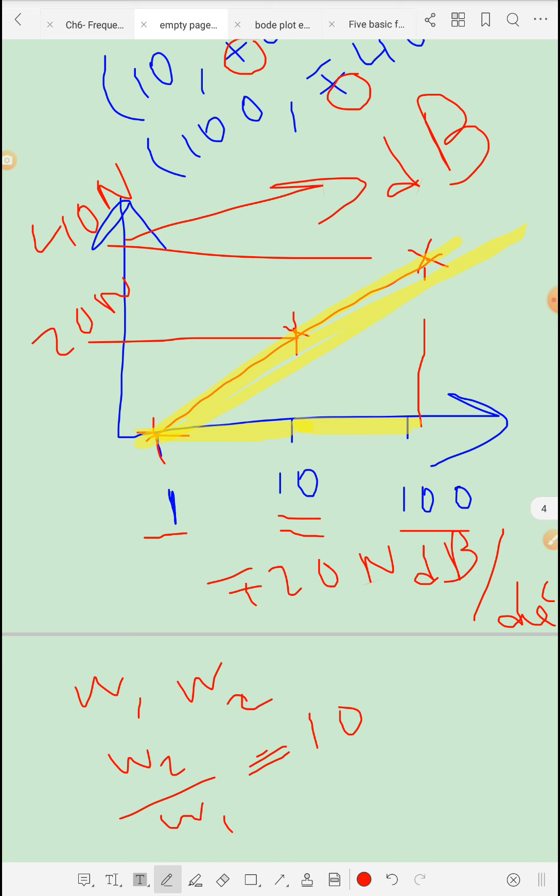If it was negative, it will be minus. So the final result is that this line will be a line of slope plus or minus 20 n dB per decade. Per decade means the ratio is 10 between two frequencies, so between them it will have this plus or minus 20 dB. Plus will be for zeros, and minus will be if we have poles at origin.

And if you remember, the poles at origin, we call it system type, and we give it the symbol n. This is why we are using n, because zeros at origin are rarely encountered, but poles at origin, the system type, frequently appear in transfer functions. So I will go back to our location.

Okay, so we have proved that this will be a straight line, and its slope will be plus or minus 20 n dB per decade, and when the frequency is 1, it has a value of 0 dB. So it should pass through the 0 dB line at omega is equal to 1.

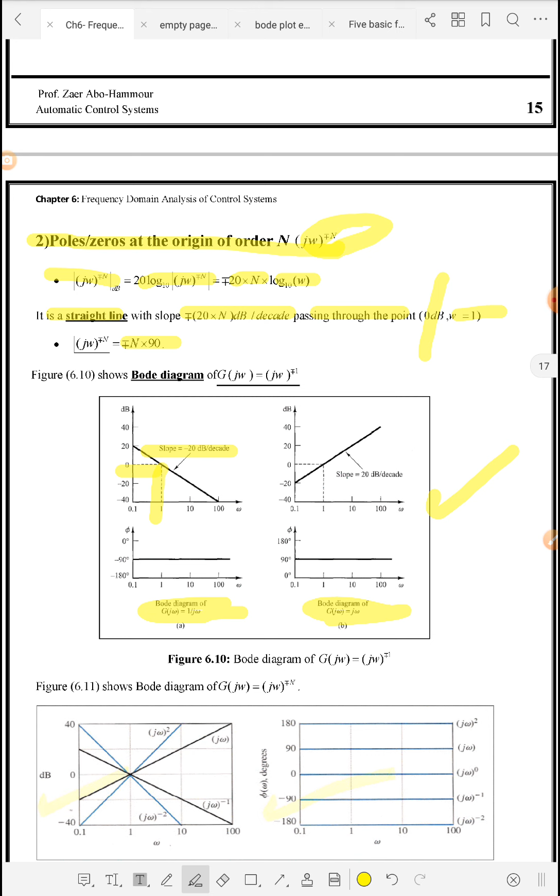And the phase for any pole or zero at origin will be plus or minus 90 n. Plus or minus 90 n. Why plus or minus 90 n?

Okay. If we consider that we have a zero at origin, which is j omega, so if we plot this zero in the real and imaginary axis, it will be located here. Okay, so regardless of the frequency, it will be always on the imaginary axis. Whether the frequency omega is 1 or 10 or 100, it will be always on the imaginary axis.

And as we studied in root locus, the angle will be from the positive real axis in the counterclockwise direction. So what's this angle? It's always 90 degrees. So if we have a single zero, the angle will be 90. Okay, if we have a zero at origin repeated of power 2, like s squared, what will be the case? It will be j omega to the power 2, which is equal to minus omega squared. Where's minus omega squared? It will be on the negative real axis. Regardless of omega, it will be here or here or here. So it will be always on the negative real axis. So what's its angle? It will be minus 180 degrees or plus 180 degrees.

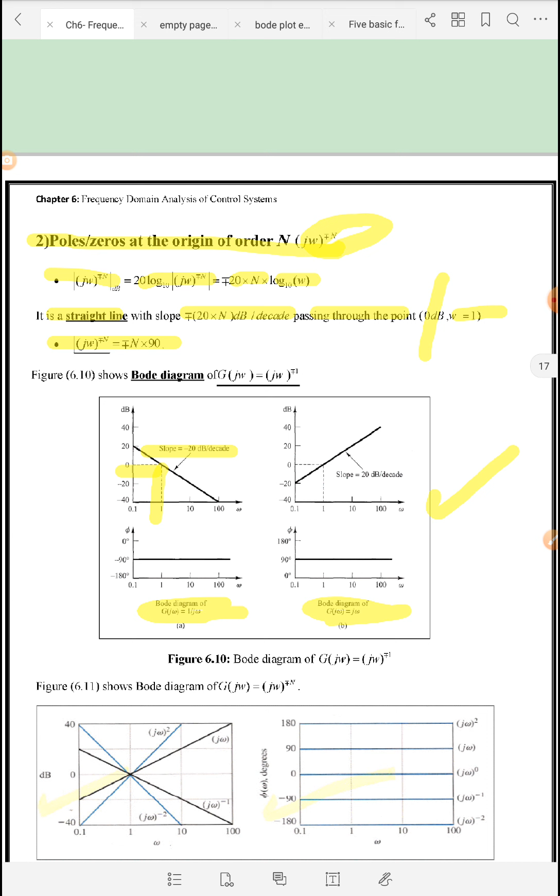So we understood that for a single zero, s, it's 90. S to the power 2, it's 180. 1 over s, it's minus 90. 1 over s squared, it will be minus 180 degrees, regardless of the frequency. It's constant for all frequencies. So what's the general rule? The general rule is that it will be plus or minus 90 times n degrees. So if n is 1, it will be plus or minus 90. If n is 2, repeated, it will be minus 180 or plus 180. This rule is clearly written in the handouts. It's here. The angle or the phase is plus or minus 90n.

Okay, so again, if we return to this figure, regarding the phase plots, this one and this one, for the pole it will be minus 90. As you see here, it's minus 90, and it's fixed for all frequencies. And if it is a zero, it will be plus 90, and it's fixed for all frequencies. So this is the case of a single pole or single zero, as obvious here.

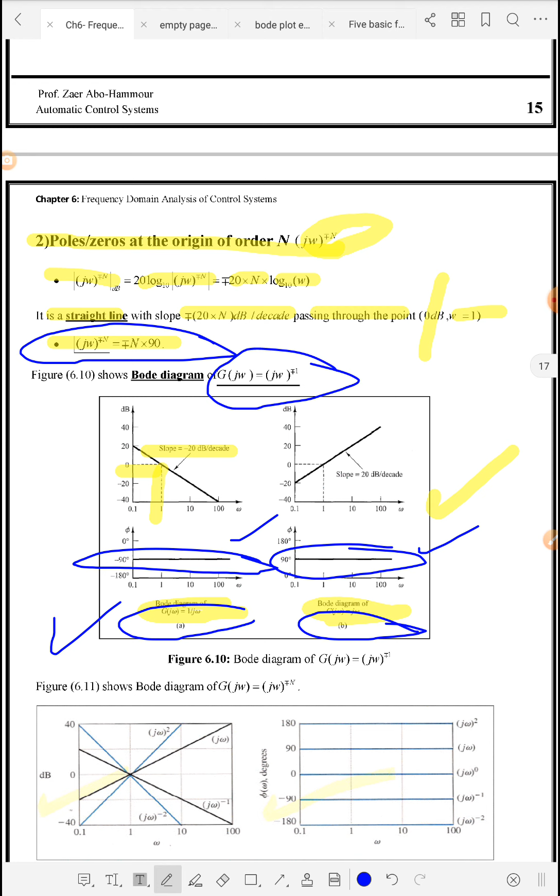So in the general case, as I discussed on the empty page a minute ago, if we want to have more cases and discuss the angle, here, if no poles or zeros, it's 0. If we have one zero, 90; two zeros, 180. One pole, minus 90. Two poles, minus 180.

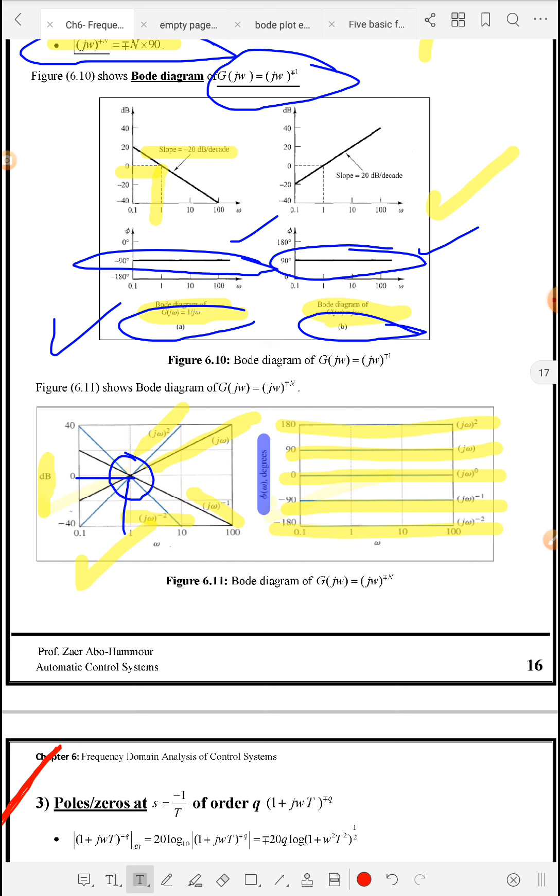And regarding the magnitude plot in dB, if you have one zero and check the slope, as I mentioned, it will be plus 20 dB per decade. If we have two zeros, it will be plus 40. If you have one pole, minus 20. If we have two poles, it will be minus 40. And if you pay attention, all of them pass through this point. What is this point? It's at a frequency of unity, the value is 0 dB, as I mentioned before. So I hope everything is clear regarding the second term, which is poles or zeros at origin.

Let us switch to the third factor, which is real roots. Real roots at s equal to minus 1 over T with multiplicity q. With multiplicity, they might be simple real roots or repeated roots. And the root location is at s equal to minus 1 over T. So if we calculate the gain in dB, it will be 20 log the absolute value of this term. We take this q outside the log, and we calculate this, which is the square root of the real part squared plus the imaginary part squared. It's the argument of the log.

Okay, so if we pay attention to our root, there is 1 and there is j omega T. There is 1 and there is j omega T.

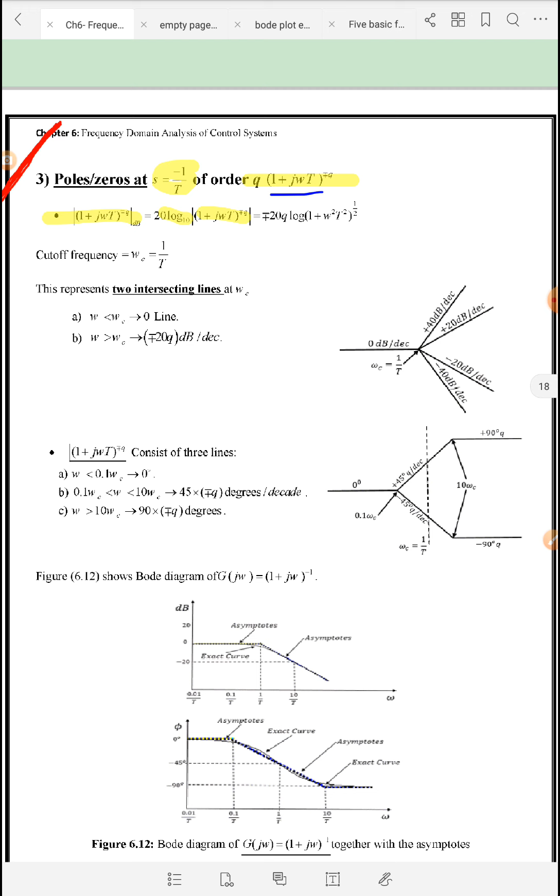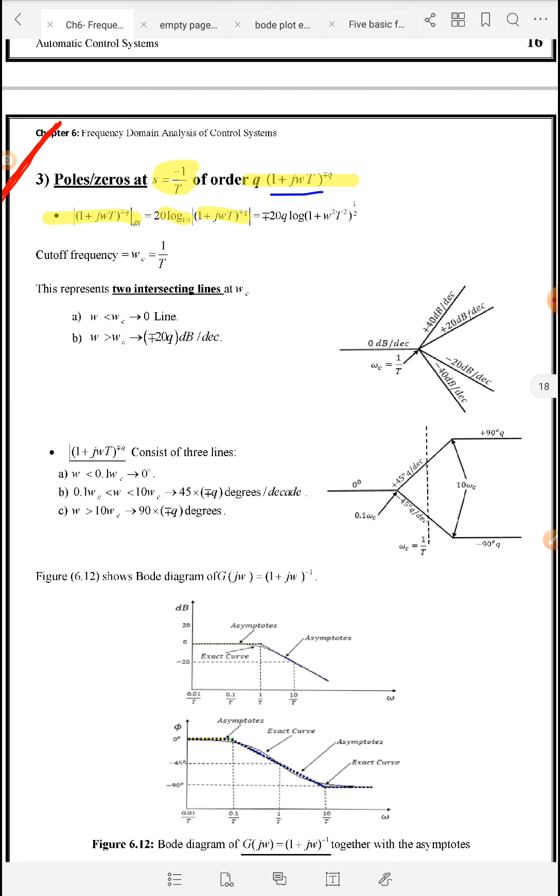Okay, here, as I mentioned, we were comparing the frequency with 1 over T, which is less or more. So we call the cutoff frequency, or the corner frequency, 1 over T. And as I mentioned, if omega is much smaller than omega c, it will be the 0 dB line, this one. And if omega is larger, then it will be same as pole or zero at origin. It will be plus or minus 20, but there it was n, and here it's q dB per decade. So it will be here for 2 zeros, or a repeated zero, here single zero, here single pole, here 2 real poles.

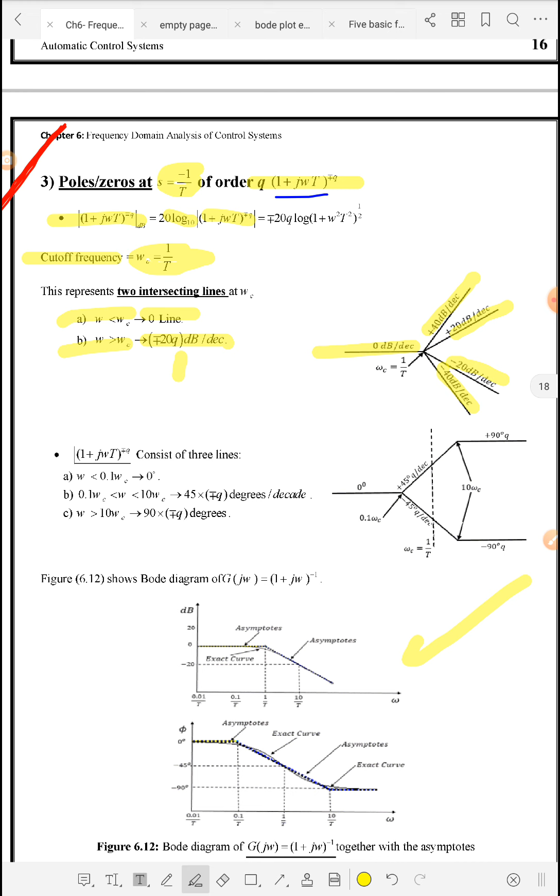So in order to validate that we are working in the correct direction, we will draw the magnitude and we will observe this figure. Okay, pay attention to this figure. In this figure, we have drawn the exact curve and the asymptotic curve. Here is the corner frequency I mentioned, it's 1 over t. And we are dealing with decades, 10 over t, 0.1 over t, 0.01 over t. The ratio between each frequency and its next right or next left is 1 decade.

So if we focus on this graph, we see that the asymptotic graph of two asymptotes is very close to the exact. Where is the exact? This is the exact one, the solid line. So both of them in this area and in this area are coincident, while here there is a very minor difference between the asymptotic and the exact. So our graph based on two asymptotes, this asymptote and this asymptote, is very close to the true case. So based on that, our approximation is very nice. Okay, so this is regarding the magnitude.

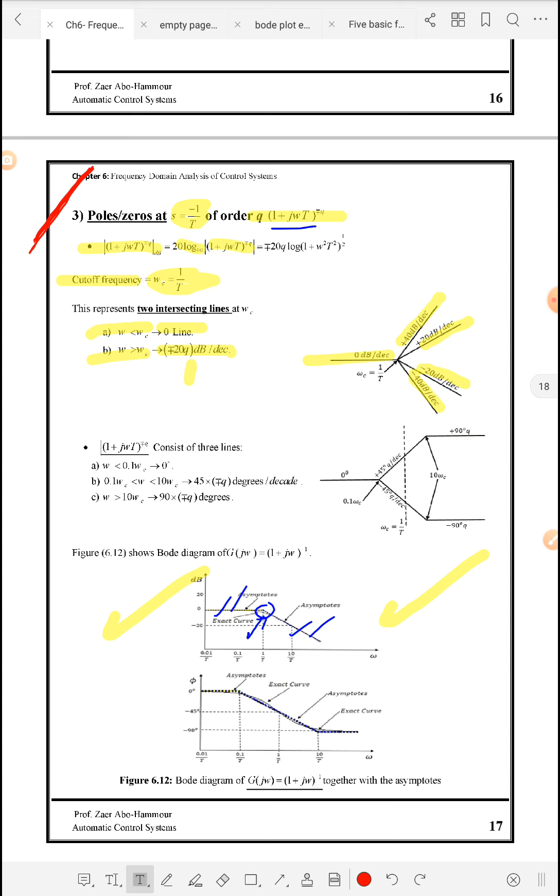Okay, if we draw the phase part, here the phase part is drawn. And as we see, this phase part consists of three asymptotes or three straight line segments. This is the first one. This is the second one. And there is one that is connecting them. So there are three asymptotes for the angle or the phase of this, not origin, sorry, real pole. Here, if you see, it's a real root, a real pole.

Okay, so the phase graph consists of three asymptotes: this one, and this one. And each is valid within a certain range. The first asymptote is valid for all frequencies less than 0.1, or 1 decade below the corner frequency. Here is the corner frequency, 1 over t. So 1 decade below the corner frequency is this one. And for all frequencies less than 0.1 omega c or 0.1 over t, we have this approximation, which is 0 degrees.

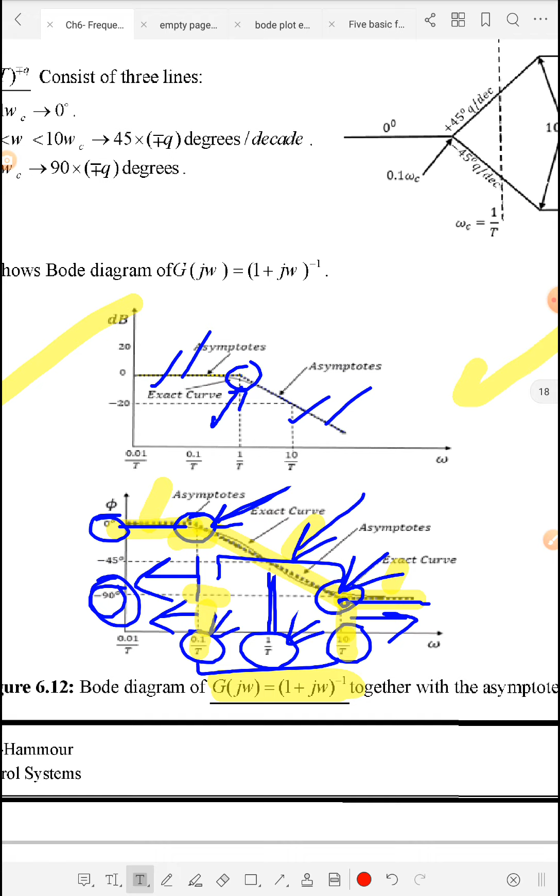So if we pay attention to the handouts, the phase of this one consists of 3 asymptotes, not 2 asymptotes. For frequencies less than 0.1 omega c, 1 decade below the corner frequency, they are 0. For frequencies larger than 10 omega c, they are plus or minus 90 q. In our case, minus 90 in this example. If we have a zero, it will be plus 90. If we have 2 zeros, it will be plus 180. If we have 2 poles, it will be minus 180 degrees.

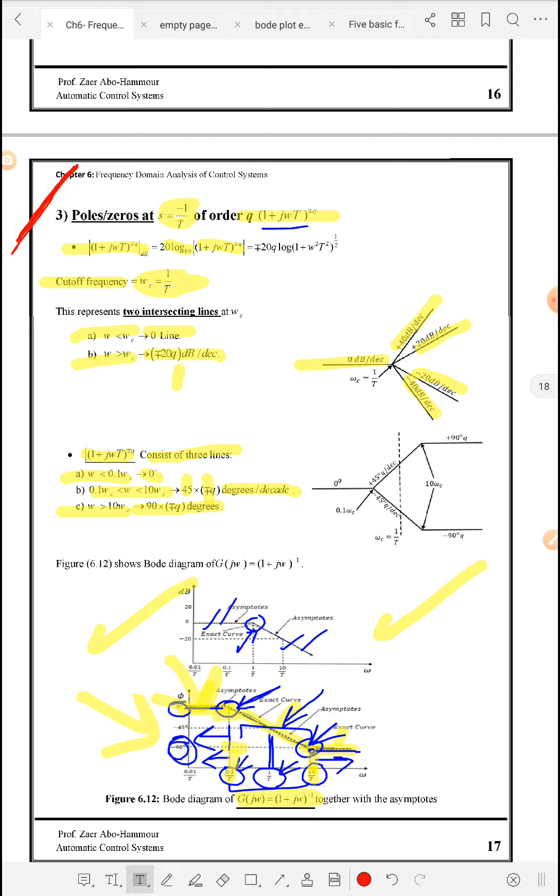And in the area between them, from 0.1 omega c till 10 omega c, the slope will be 45 degrees multiplied by plus or minus q, which is the repeatability, degrees per decade. And in this figure, it's 0 for all frequencies less than 0.1 omega c. If we have zeros, it's plus 90q; if we have poles, minus 90q. And for this segment, it's plus 45q degrees per decade, and for the case of poles, it's minus 45q degrees per decade. And this is the corner frequency.

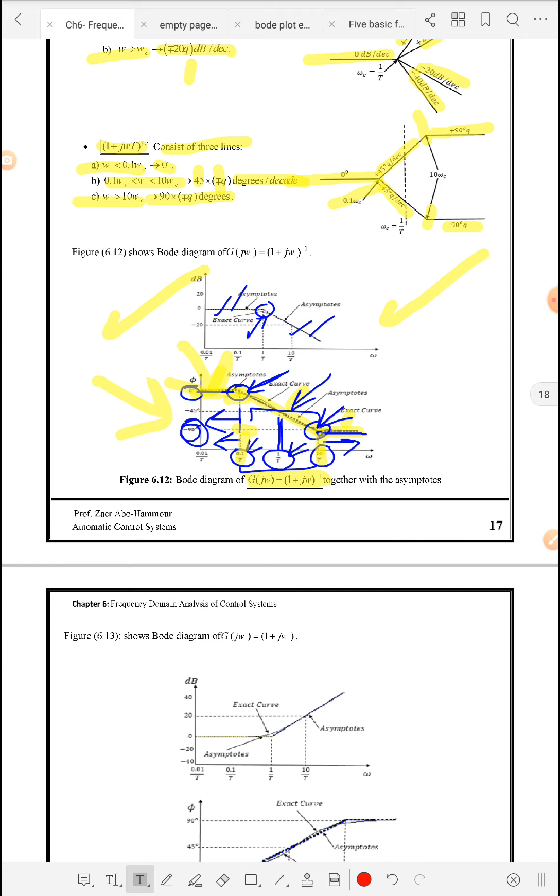Okay, so this is the case of the Bode plot for real roots, whether they are poles or zeros. If we switch to the case of a zero instead of a pole, the asymptotes will be 0 here, and plus 20 for the magnitude. And for the phase, it will be 0 below 0.1 the corner frequency, it will be 90 for the zero after 10 times the corner frequency, and within this interval, it will be plus 45 degrees per decade.

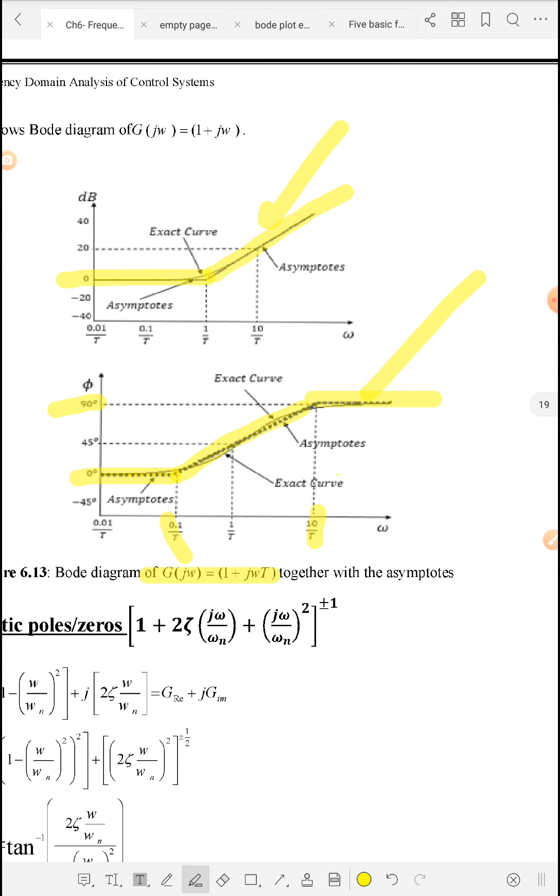So we should differentiate between low frequencies and high frequencies. For very, very low frequencies, the contribution will be 0 for phase and magnitude. And for high frequencies, this will be similar to the zero at origin. So the real roots for very high frequencies will be identical in their behavior in the Bode plot to the poles or zeros at origin exactly.

But the difference lies in the low frequencies or intermediate frequencies. This is the intermediate and this is low. For low, it's zero, and for intermediate there is a transition from zero at low frequencies to the behavior similar to the poles or zeros at origin at high frequencies.

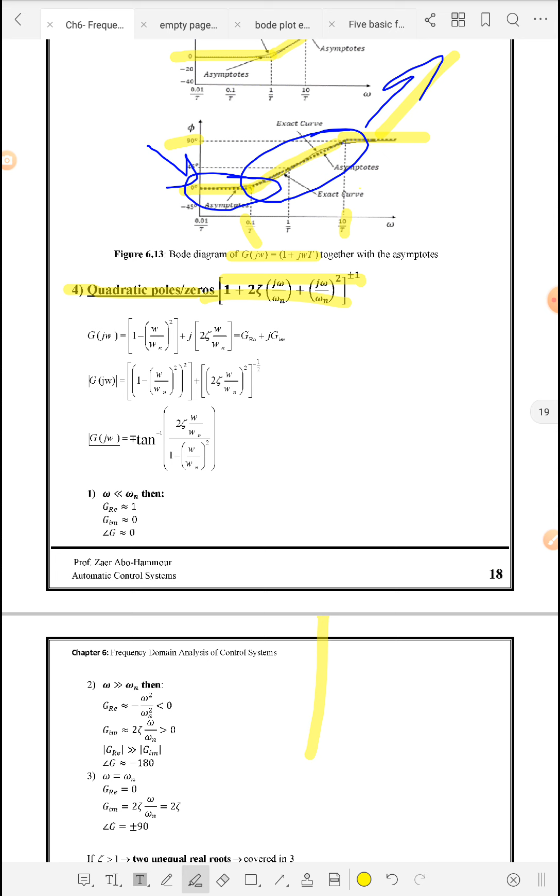Okay, now we will switch to the fourth term, which is quadratic poles or zeros. It might be a pole or zero, quadratic, and here we are not dealing with multiplicity. And we should clarify one point in this regard. The quadratic term depends on the value of zeta. You have taken this in the modeling and simulation course, and we repeated it in the initial lectures of our course.

If zeta is greater than unity, we call this system overdamped, and there are two distinct roots. Then they are covered in the previous case, like two corner frequencies, and we can plot as I have just covered. And if zeta is equal to unity, we call this critically damped, and the roots will be real repeated. That will also be covered in the previous case with multiplicity q, which will be 2.

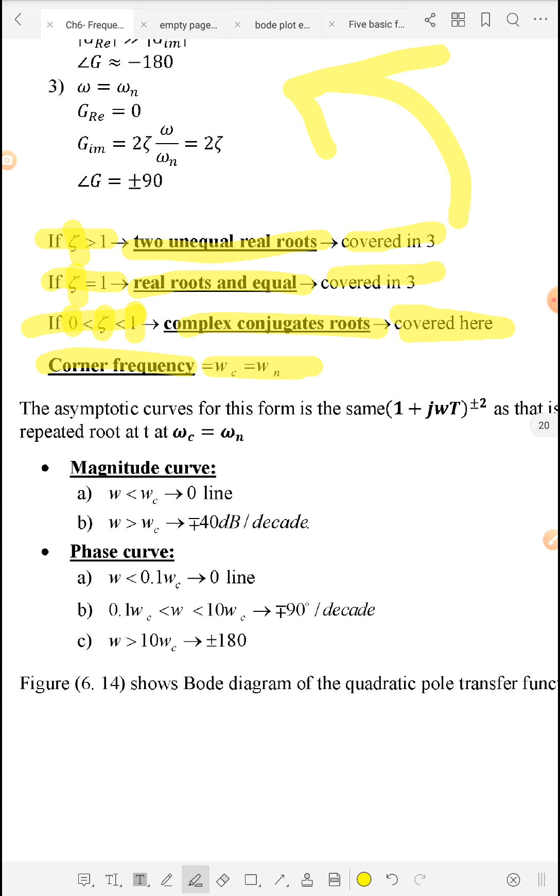So the only case we are dealing with here is complex conjugate roots, which is the underdamped case, and for this case, zeta should be between 0 and 1. The corner frequency omega c for this complex conjugate case will be omega n. And how can we deal with this case?

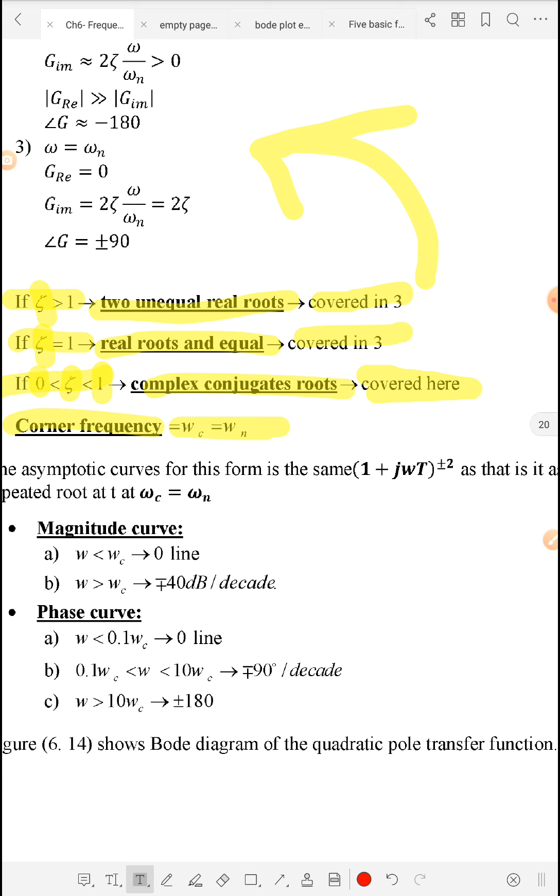This case actually depends on approximations heavily, because here we are assuming that the asymptotes of this curve are similar to the real repeated roots. So we are saying in this case that the complex conjugate will have the same graph as real repeated roots with the corner frequency of omega c, which is equal to omega n.

So if we have two real repeated roots, as I mentioned, for frequencies less than omega c it will be 0, and for frequencies larger than omega c it will be plus 20 q, and q in our case will be 2, so this means that it will be plus 40 dB per decade.

For the phase case, less than 0.1 omega c it will be 0, and above 10 omega c it will be plus or minus 90 q, and q in this case is 2, so this means plus or minus 180, and between them we are shifting between 0 and 180 in two decades, so it should be plus or minus 90 degrees per decade.

So complex conjugate roots are based on an approximation which is not valid for all zeta values. Okay, it's not valid for all zeta values. It's good for zeta that is larger than 0.3 or 0.4, but for zeta values that are close to 0, it's not a good approximation.

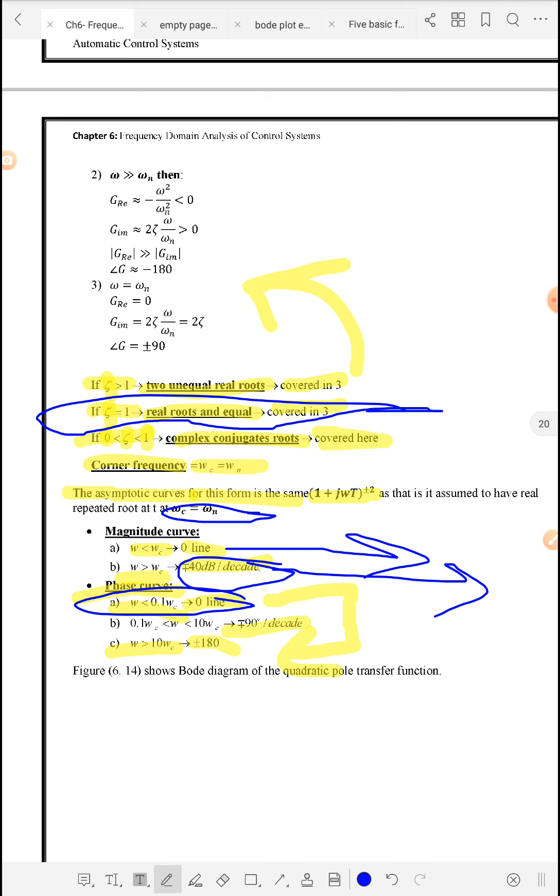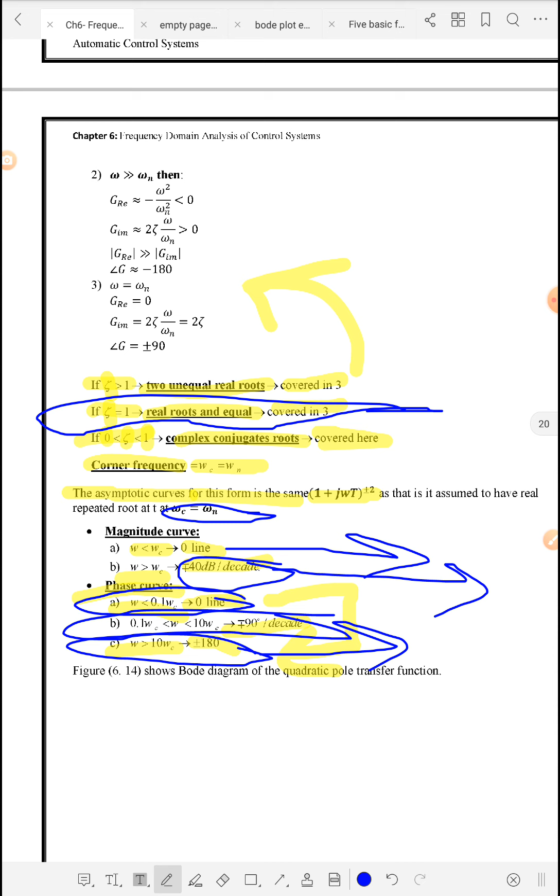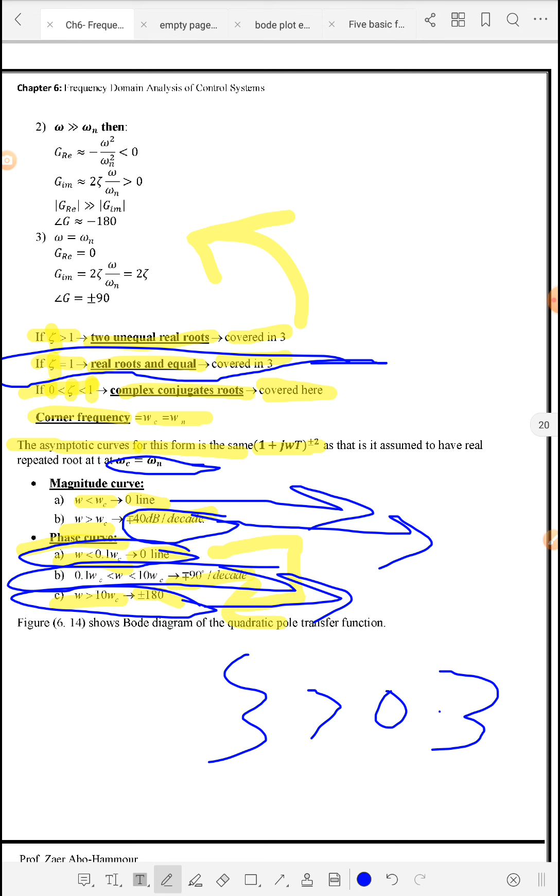If it is a zero, it will be plus 180. If it is a pole, it will be minus 180. And in between, it should be plus or minus 90 degrees per decade, depending on whether it's a pole or zero. And as I mentioned, this approximation is good for zeta values which are away from zero. Zeta should be within the range greater than 0.3, because as zeta comes closer to 0, this approximation is a very poor approximation.

And why? Because we have covered a similar thing. Do you remember this curve? We have covered before that as we approach 0 zeta, this resonance peak will be very high. So for values of 0.3 and above, this approximation might be okay. But if it is close to 0, this approximation will be very bad. This is from the magnitude contribution part.

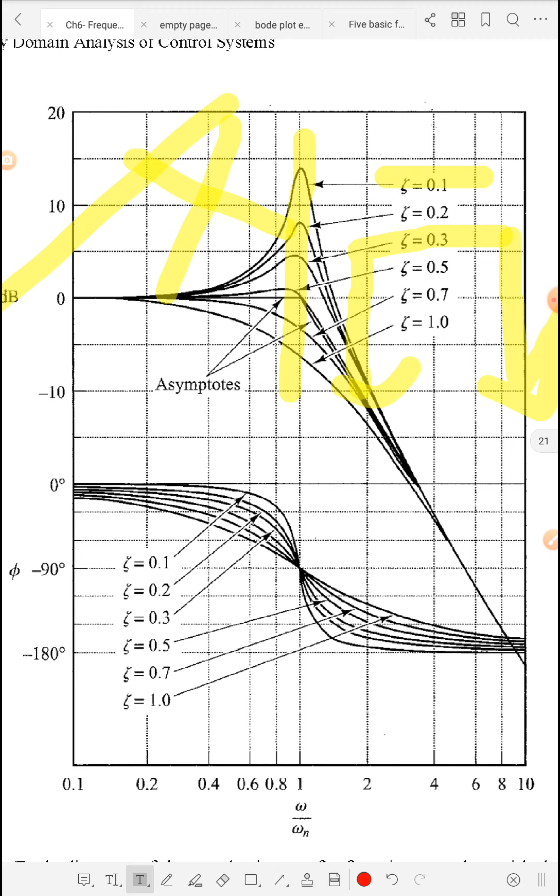And for the phase contribution part, if you pay attention to this figure, we see the transition between 0 and here, which is minus 180. But the speed of the transition and the curve is different for different values of zeta. As zeta becomes closer to 0, there is a steep transition in the angle.

While for zeta away from zero, like 0.5 or 0.7 or 1, which will be repeated, the transition will be more or less linear. So this is why I said that our approximation is valid for zeta values between 0.3 and 1, or less than 1, because 1 will be repeated: greater than 0.3 and less than 1.

Values smaller and closer to 0 will have a very bad approximation, because at zeta equal to 0, the transition will be like a negative step function, which is discontinuous here. So our approximation is valid for values away from 0. It's considered as a linear transition between here and here.

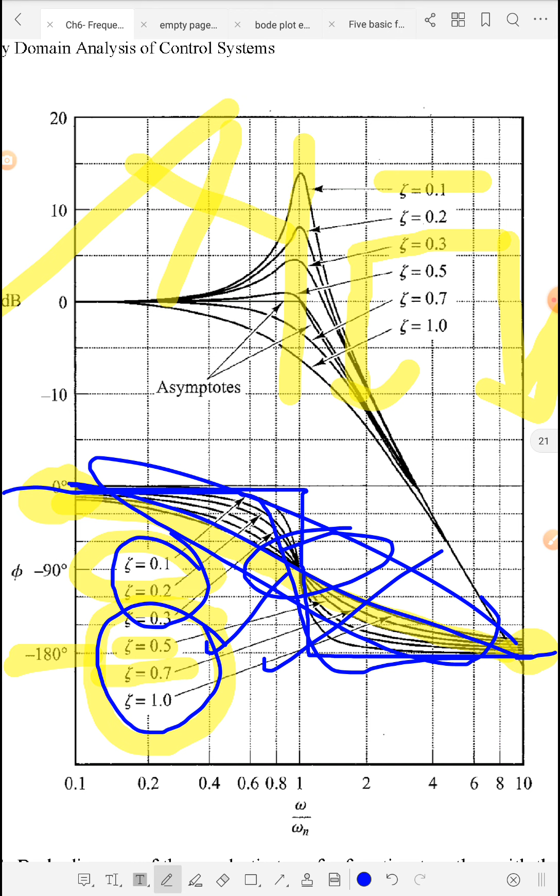Here 0, here 180, and here is the linear transition between 0 and 180 for values of zeta within this range. For values of zeta less than 0.3, it will have a very sharp transition, and our approximation will be very bad.

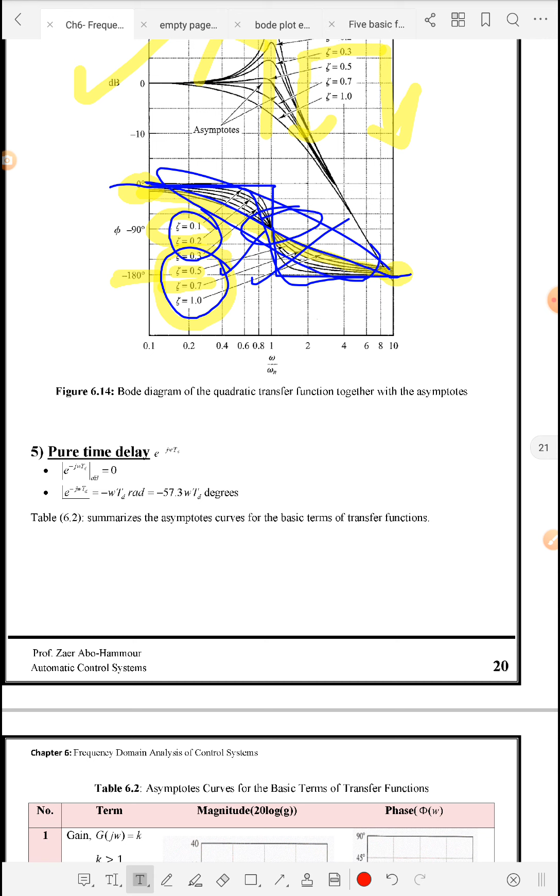So let us switch to the final term among the 5 basic factors. The 5th term is the pure delay, e to the power minus j omega td. Td is the time delay. If you remember Euler's formula, you can write this exponential as sine and cosine, and you find that its value will be unity in the normal scale, and in the dB scale it will be 0.

So the magnitude contribution of any delay is 0 in dB and unity in normal scale, and its phase will be minus omega td, the argument without the j, in radians. And how can we convert it? If we convert radians to degrees, it will be minus 57.3 omega td degrees. This is what we need, because we are dealing with everything in degrees.

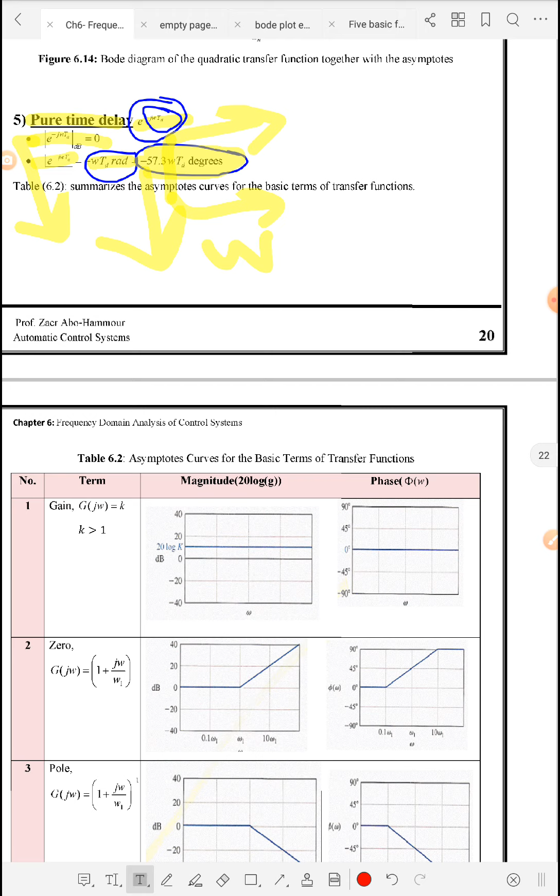So the delay has 0 magnitude contribution, while it has a phase contribution of minus 57.3 omega td, and it's dependent on omega. It's a function of the frequency omega. It's not constant. Okay, so this page summarizes all of the factors that I have previously discussed.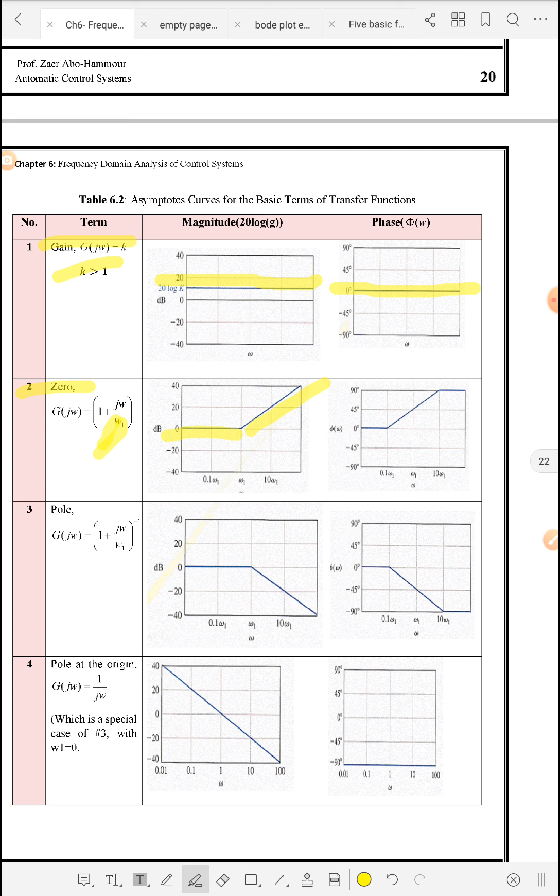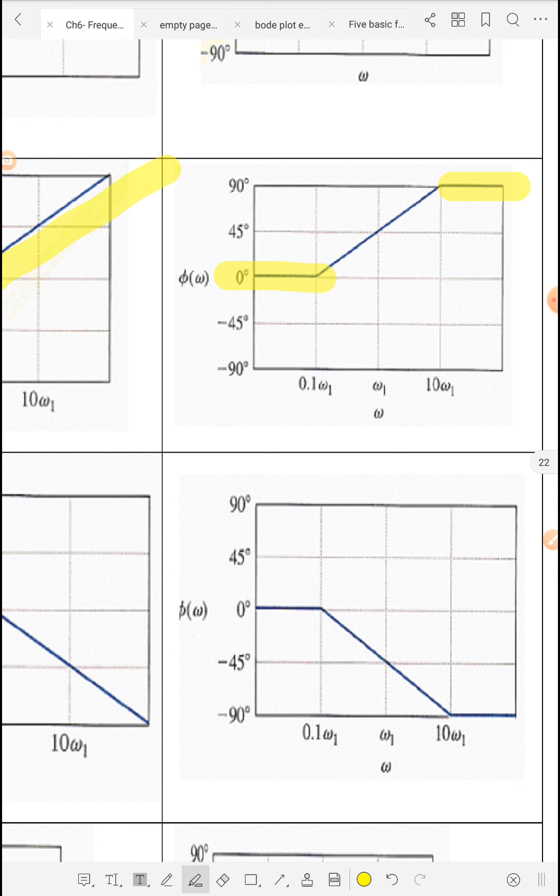Okay, here we have k, constant gain k, and we assume that k is greater than unity. So this is why we have here a constant of positive dB and its phase will be 0. If we have a simple zero of corner frequency omega 1, before the corner frequency it will be 0 and after it will be plus 20 dB per decade, and the phase will be, for 1 decade below the corner frequency, 0, 1 decade after it will be 90, and in between it will be plus 45. So this is the case of a zero.

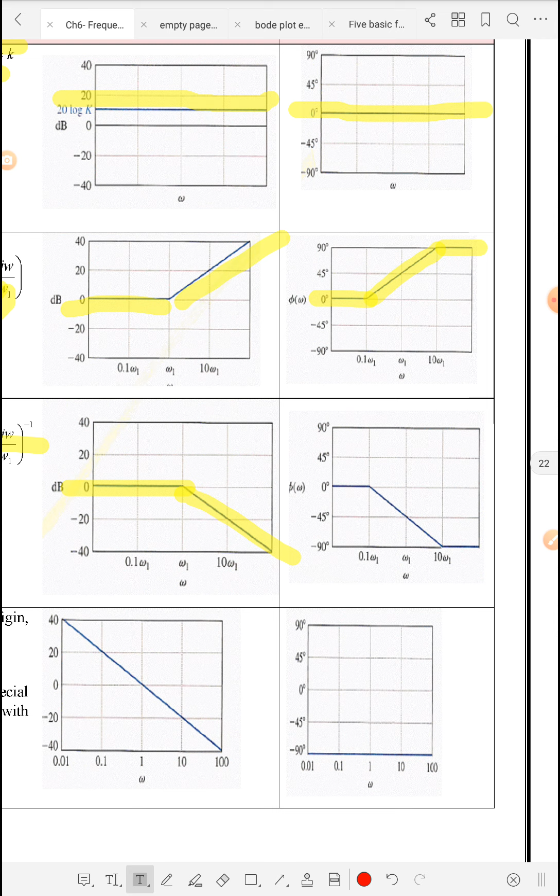Similar thing but with negative signs for a pole, real pole. So for less than the corner frequency it's 0 and higher than the corner frequency it will be minus 20 dB per decade. This is for the magnitude. And regarding the phase, 1 decade below the corner frequency 0, 1 decade after it will be minus 90, and in between it will be minus 45 degrees per decade.

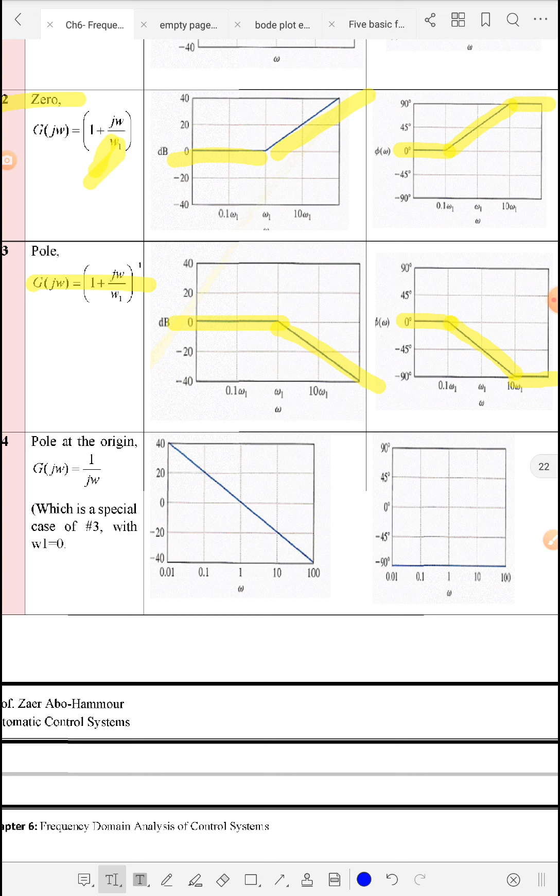The final one in this table, or not final one, if we have a pole at origin, we have a constant slope of minus 20 dB per decade for all frequencies. It has no corner frequency, so the slope is constant for all frequencies, which is minus 20 dB per decade, and its phase is, as I discussed before, minus 90.

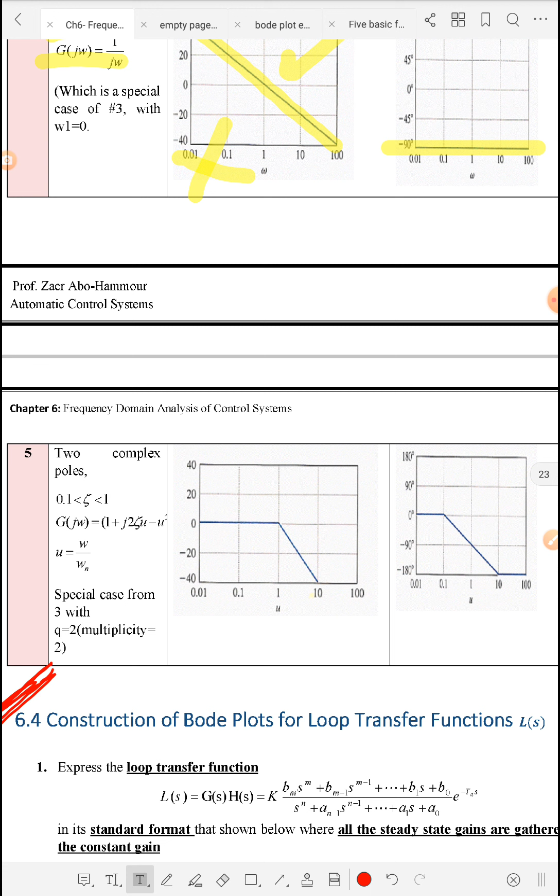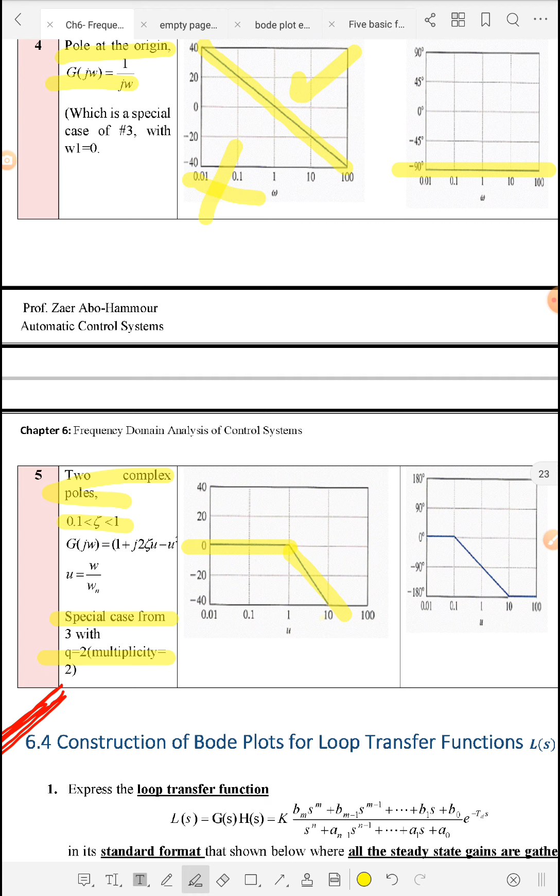So if we continue and take the last one, which is complex conjugate roots, with zeta within this range, and as I said it's a special case of the third case with multiplicity of 2, so it will be 0 for lower than the corner frequency and higher than the corner frequency it will be minus 40 dB per decade, because here we have a pole. And for the phase part it will be 0 1 decade below the corner, minus 180 1 decade after, and in between it will be minus 90 degrees per decade.

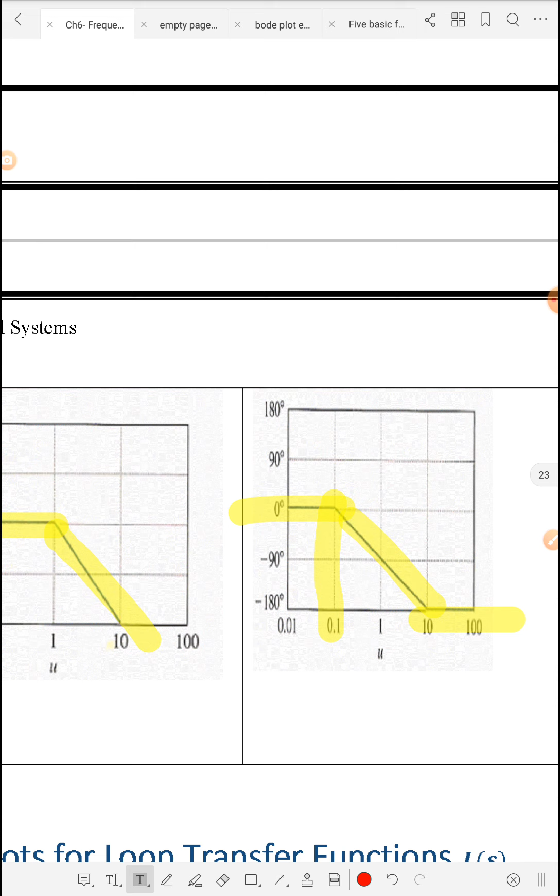Okay, so I have summarized all of the previous... sorry for the interruption.

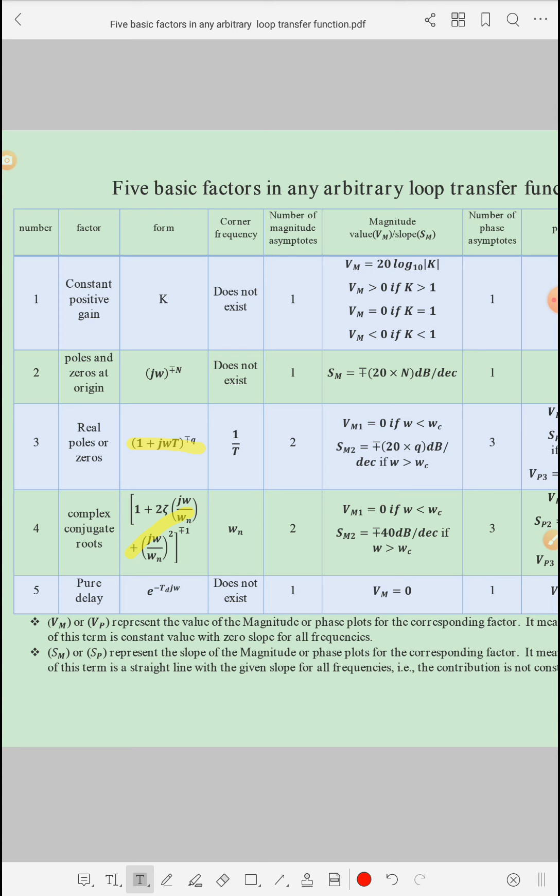So 3 factors out of the 5, the gain, the poles and zeros at origin, and the delay, don't have a corner frequency. Only 2 have corner frequencies. What are they? They are real roots, real poles or zeros, or the complex poles or zeros. Okay, and I have covered in this table all of the details that I have previously discussed.

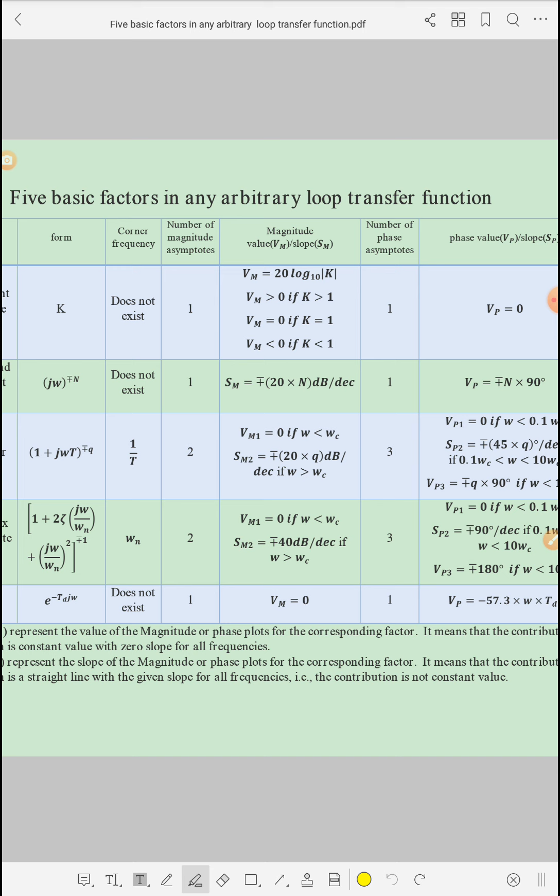Sorry, it seems that this file is not working with me. So I have already sent it to the coordinator. Please go through it. It's a summary of what I have discussed before. You might take it from the coordinator and study it, because it's not working okay with me.

It always shuts down this folder, and we are ready in the next lecture to cover the drawing steps, or how to build the Bode plot for any general loop transfer function.